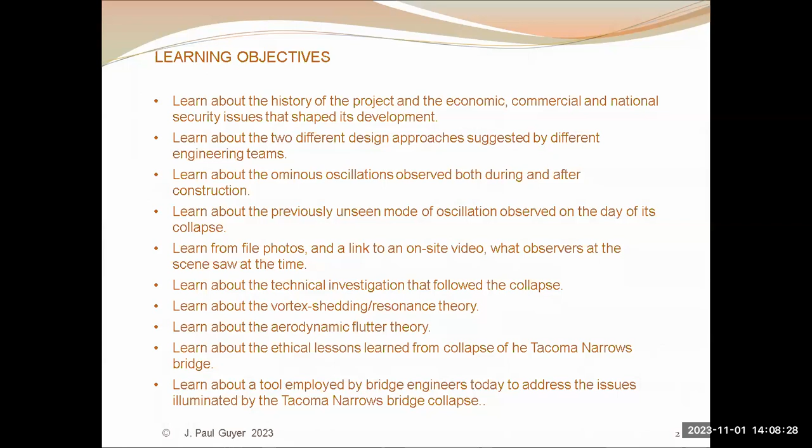Now here's what I'll be talking about, kind of the way we'll walk through this. First of all, I'm going to give you quite a bit about the history of this project, because it's because of the history of the project that the ethical issues arose. This will hopefully be clearer as I move forward. We'll look at the design proposals for this particular bridge, the Tacoma Narrows Bridge.

The problem with the bridge cropped up while it was still under construction, before it was ever completed. And the big indicator that something was wrong is the bridge started to oscillate. There were some Band-Aid type measures applied to the bridge to try and mitigate this oscillation. Then on a particular day, the oscillations increased greatly and the bridge collapsed.

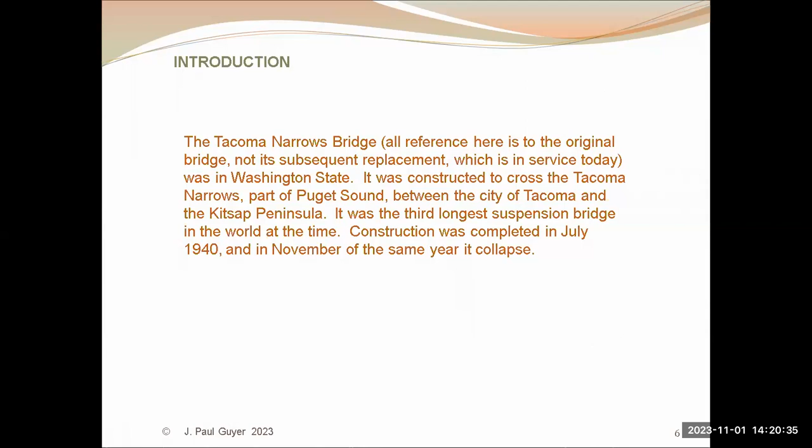This bridge was constructed to cross the Tacoma Narrows part of Puget Sound, between the city of Tacoma and an undeveloped area called the Kitsap Peninsula or Olympic Peninsula. This bridge was at the time the third longest suspension bridge in the world. Construction was completed in July of 1940, and in November of that same year, it collapsed.

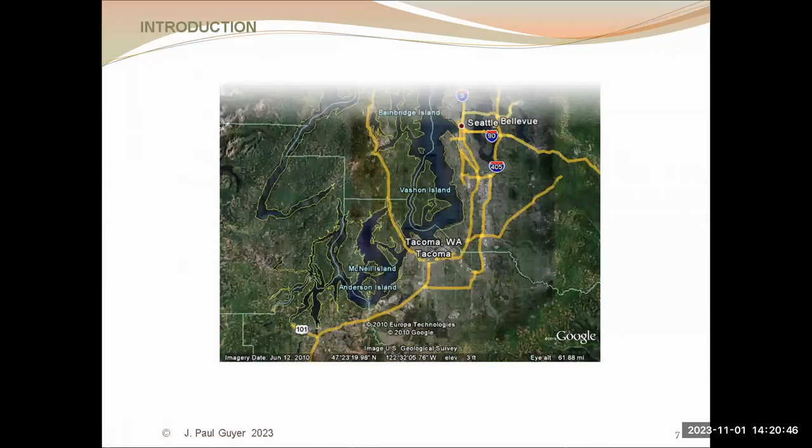Let's see, I've got an indicator here that there's a chat message. Okay, Joseph said he had a problem connecting to Zoom, but he's connected now.

So anyway, this is what we're talking about. Again, this is going to sound like a history lesson, but I believe it's very relevant, as far as this collapse of the bridge, that you understand the history of it, because it was the history that drove the unfortunate decisions that led to the collapse.

Here you see an aerial view of part of Puget Sound. You see the city of Seattle on the upper right-hand side, and then the city of Tacoma, and the red arrow pointing to the waterway, the Tacoma Narrows - the bridge was across that body of water, that channel.

You also see some things highlighted that you're probably wondering what they're doing there: the Bremerton Navy Yard, McChord Airfield, and Fort Lewis. Bremerton Navy Yard was then, and is now, one of the most important military facilities on the Pacific coast. At the time of this incident there was a facility called McChord Airfield. In the late 30s and early 40s there was no Air Force - the airplanes belonged to the Army - so there was something called the Army McChord Airfield down at Tacoma.

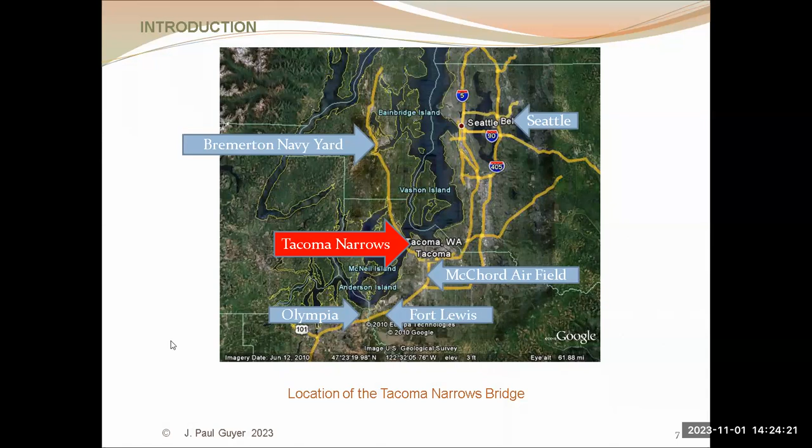The problem was the distance between McChord and Fort Lewis and Bremerton. Here are some numbers that give you a picture of how long it would take to get from Tacoma to different places on the Kitsap and Olympic Peninsula.

Because of all the waterways in Puget Sound, before construction of this bridge, to get from Tacoma, where Fort Lewis and McChord were located, to Gig Harbor on the Olympic Peninsula, driving around all the channels would be 107 miles. But with a bridge across the Tacoma Narrows, the distance would only be 8 miles. So driving time would change from 2 hours 10 minutes to about 17 minutes. Specifically from Bremerton to McChord, driving around without the bridge would be 79 miles versus 39 miles with a bridge, so driving time would be reduced from an hour 50 minutes to 55 minutes.

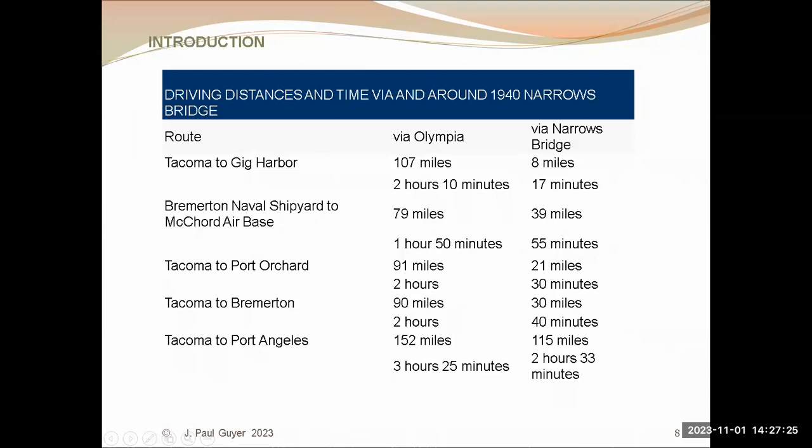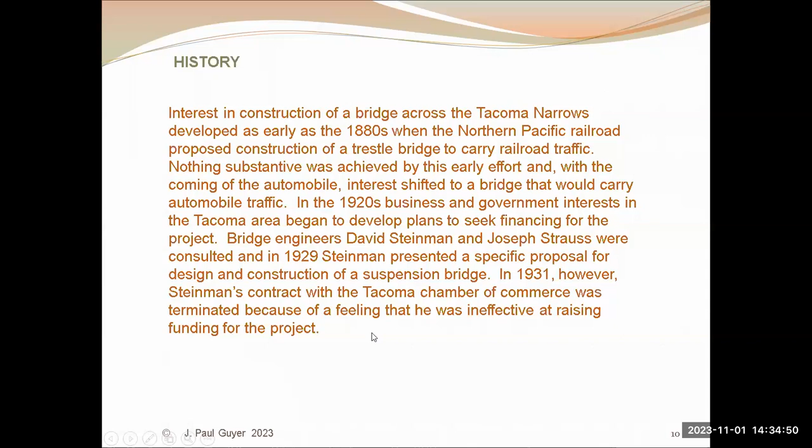And the business and government interests were interested in having a bridge across the Tacoma Narrows for their commercial purposes, to get between Olympia and Seattle and Tacoma and Seattle. So in the 1920s, commercial interests began to agitate for a bridge across the Tacoma Narrows, and the city had some bridge engineers draw up some schemes to use to try and get the financing for a bridge.

Let's see, hang on a second. I've got a leaf blower outside my window. I'm going to put some shutters down. Hang on for just a minute.

Okay, I think I may have gotten rid of that

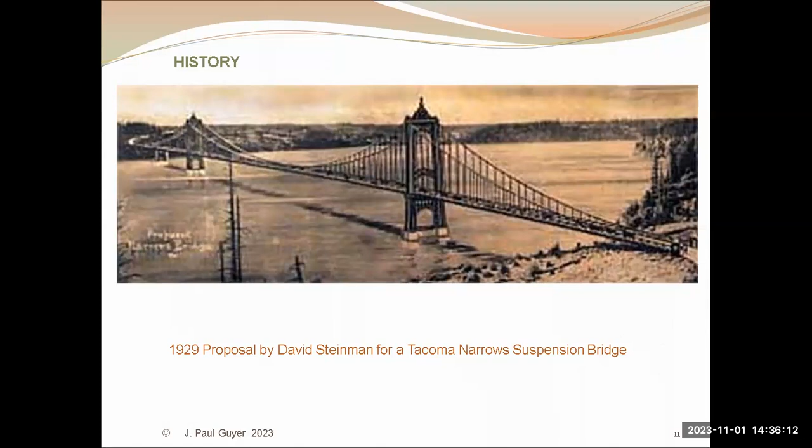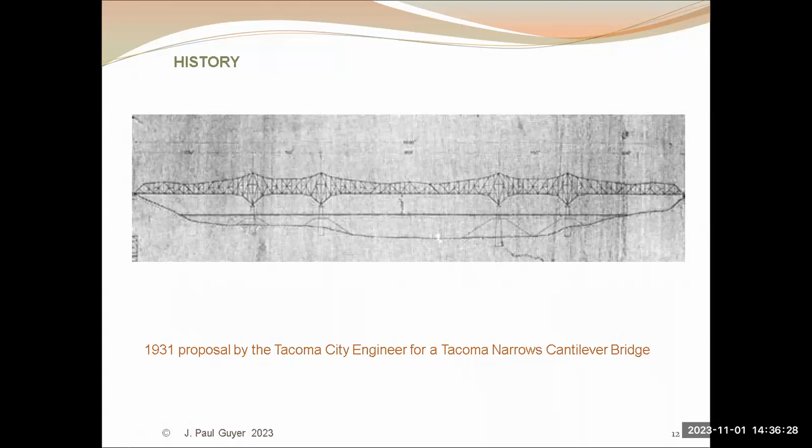So here was a proposal, a nice, attractive bridge, and no money to build it with. Here was another scheme that was proposed, a cantilever bridge, drawn up by the Tacoma City engineer. Design but no money to build it with. So no money to build a highway bridge across the Tacoma Narrows, and it was impractical to design a low-level railroad bridge.

So the commercial and business interests in the region and the state of Washington government began looking around for other ways to possibly finance the construction of the bridge.

One scheme that was explored was to use tolls to construct a toll bridge, and people would pay to use it. Nice idea, but the demand for automobile traffic up there at that time in history was very limited. So the amount of traffic possible just wasn't there to fund the construction of a toll bridge. And so that didn't pan out.

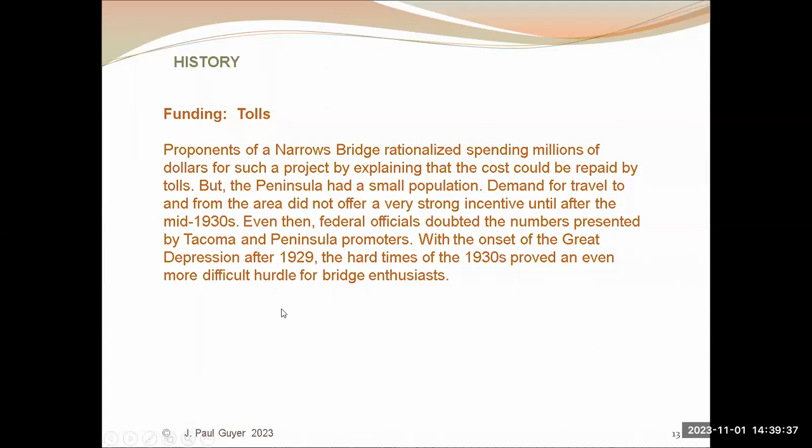But then, as you moved into the 1930s, the specter of World War II began to appear on the horizon. The importance of the Bremerton shipyard was very clear to the politicians in Washington, and the importance of McChord and Fort Lewis to protect Bremerton was also quite clear.

So the federal government began to take an interest in providing funding for the construction of a bridge. Along with the specter of World War II coming on the horizon, this was the 1930s, and of course, as we know from our history books, the US was in a deep depression during this period.

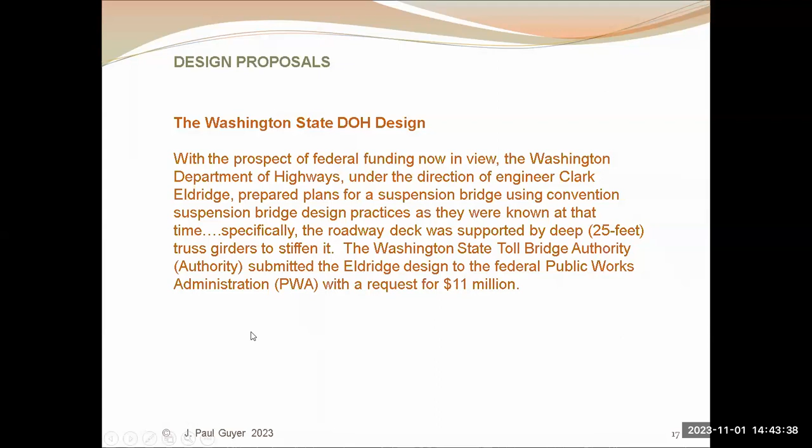The Washington State public agency that was cobbled together was something called the State Toll Bridge Authority, and the engineer who took the lead in proposing a design to the federal government was a gentleman named Clark Eldridge. He was the project engineer on the Tacoma Narrows Bridge proposal as put forth by the state of Washington.

An aside that has nothing to do with this story, but it's an interesting little vignette. The director of the Washington State Highway Department at that time was Lacey Murrow, brother of the very famous newscaster Edward R. Murrow, all through the 40s, 50s, and into the 60s. This has nothing to do with anything, but it's an interesting sidelight.

This was the proposal that the state of Washington under Clark Eldridge proposed: a suspension bridge with roadway support girders that were reflective of the experiential knowledge at that time about how to design suspension bridges, and in particular the roadway support girders.

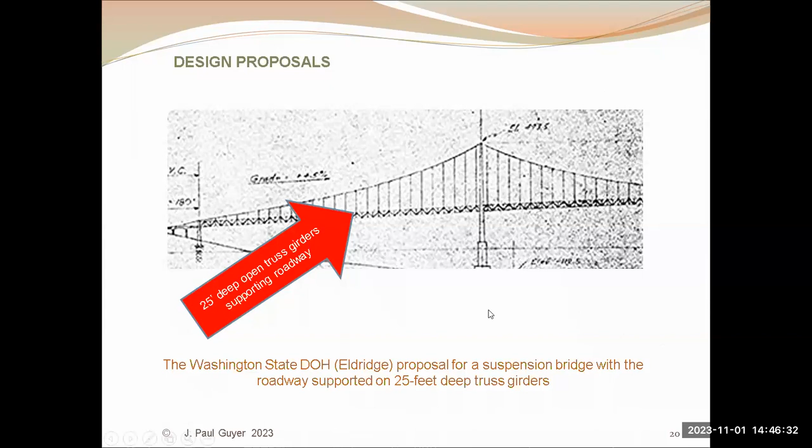So this was the proposal by the state of Washington. Now this is when economics and commercialism creeps into the picture. There's always been a pushing and shoving on major public works projects, whether they should be designed in-house by government engineers or contracted out by private engineers. So the private engineering community, particularly a group of private consulting engineers on the East Coast,

led by a prominent bridge engineer, Moisseiff, who was very well known and had a great deal of credibility at that time. These private engineers undertook to convince the government bureaucrats in Washington who controlled the purse strings to contract out the design of the bridge to them, and to convince federal bureaucrats to mandate that the state of Washington contract out the design of the bridge.

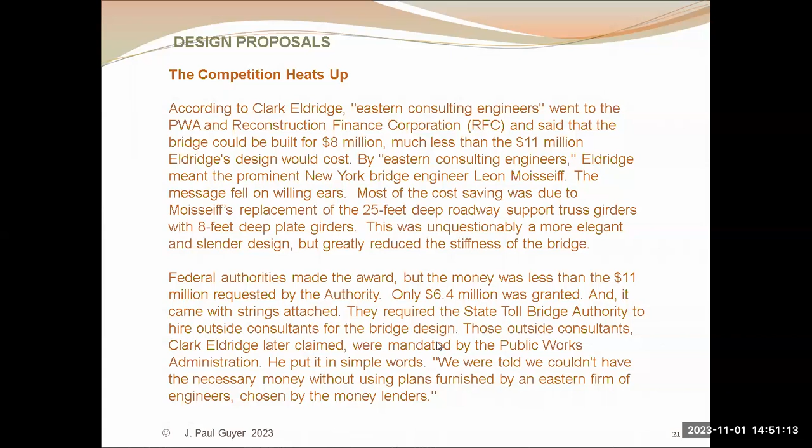The state engineers with the state of Washington were, you might say, upset by this competition from these private engineers. The state of Washington, in addition to its in-house engineers, hired expert bridge designers to evaluate Moisseiff's plan, and it was determined to be, quote, fundamentally unsound. It was indicated that the design made the Narrows Bridge lighter and narrower than any built, and this was done in the interests, quote, of economy and cheapness.

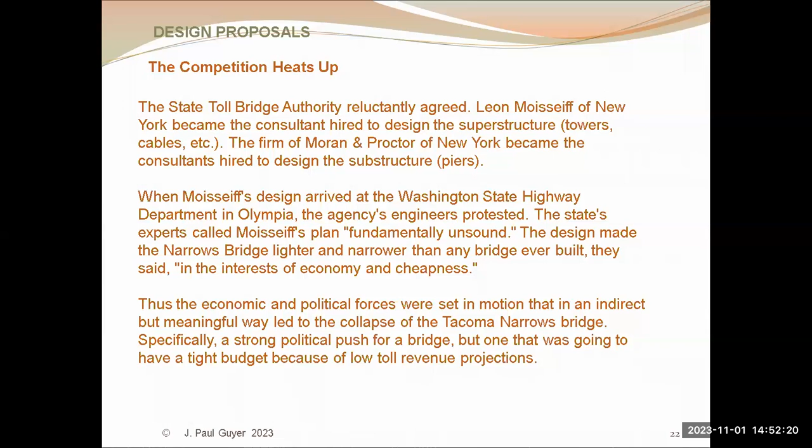So here is Mr. Moisseiff, who was leading the private engineering group, and this was the proposal that he and his associates submitted. It was a suspension bridge, but the big distinction was that the roadway support girders would only be 8 feet deep instead of 25 feet deep, and they would be of a solid I-beam configuration.

An important point that this incident really illuminated was that with open truss girders, the wind passes right through the girders. With an I-beam configuration, wind does not pass through the girders—they just function as kind of a sail, if you will.

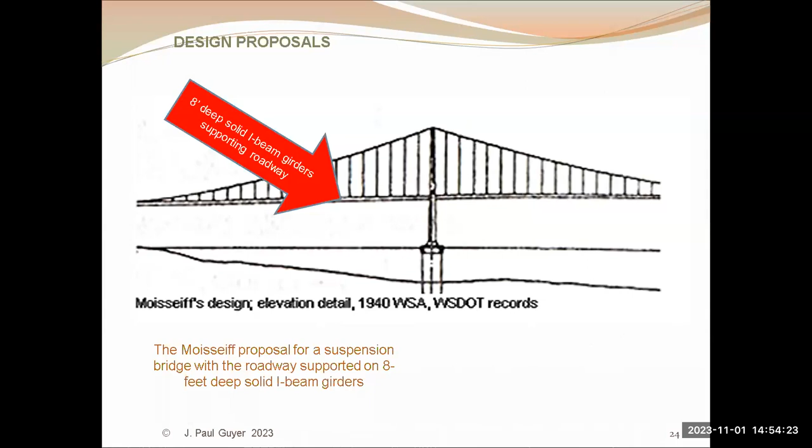So this was Moisseiff's design. He said, I can do it for 6.4 million. State of Washington's design with those big deep truss girders was going to cost 11 million. Give the mandate that the design job be given to us private engineers, and we can save you a lot of money. And the federal government bought that.

Moisseiff relied in his design on a theory of bridge design that had been published in a reputable engineering journal put out by ASCE, and it represented a deflection theory developed by an Austrian engineer.

And essentially, what his theory said was that the wind loads - and remember, Tacoma Narrows is a very windy place - did not have to all be resisted by the roadway girders, but would be transferred to the cables. So the roadway support girders did not have to be as structurally robust. But there had never been a bridge built like this, so there was no experiential knowledge. It was just theoretical knowledge, if you will.

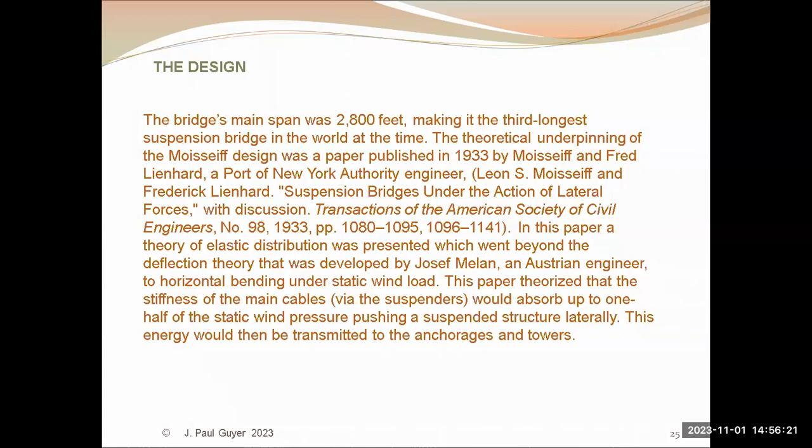And this is what Mr. Moisseiff, to a large degree, relied on, and it turned out to be tragic.

Another factor here with Moisseiff's design was that the traffic load at that point in history was projected to be very light, not much traffic. So only two lanes of traffic were designed into Moisseiff's design. So not only is it very shallow, but the roadway was narrow, and that narrowness reduces the rigidity of the combined girders and roadway structure.

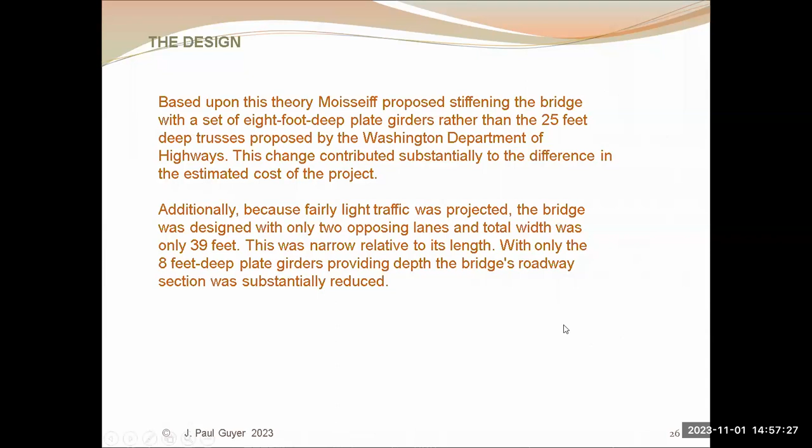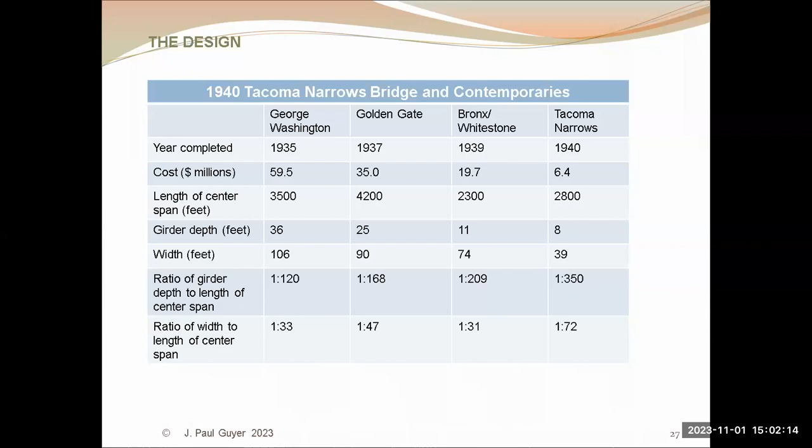So for Tacoma Narrows, the federal government said, we'll put up the money, but you've got to farm out the design to private firms. And so Moisseiff and his associates undertook the design of the bridge. Construction began in September of '38. The bridge was completed and opened to traffic in July of 1940.

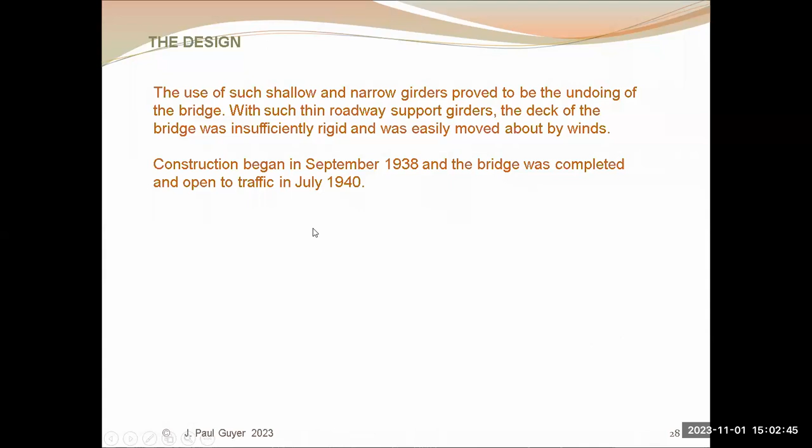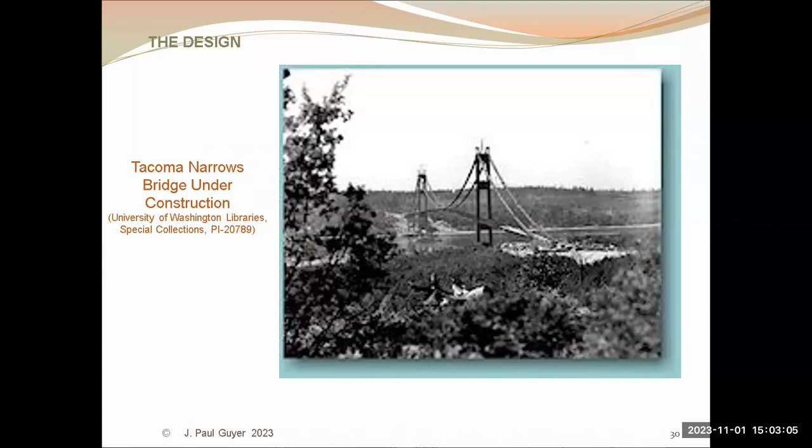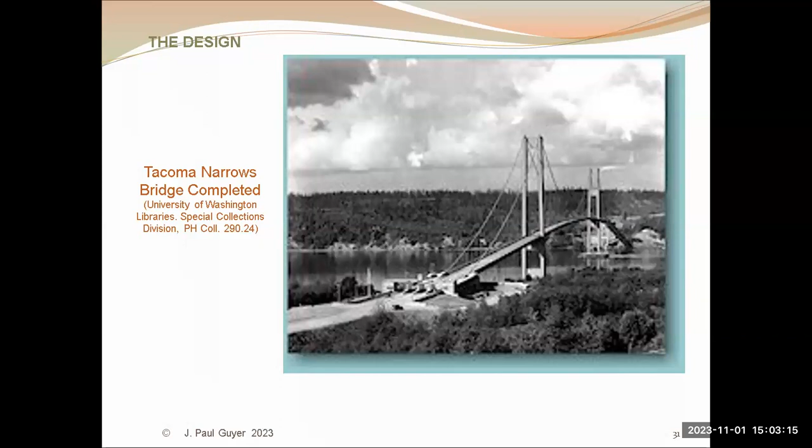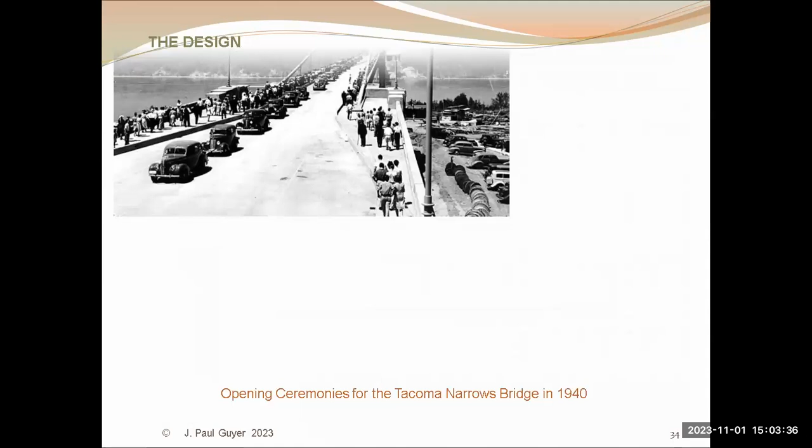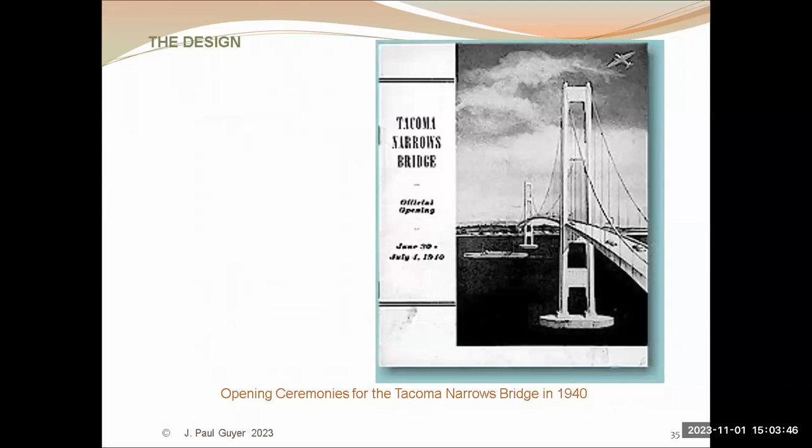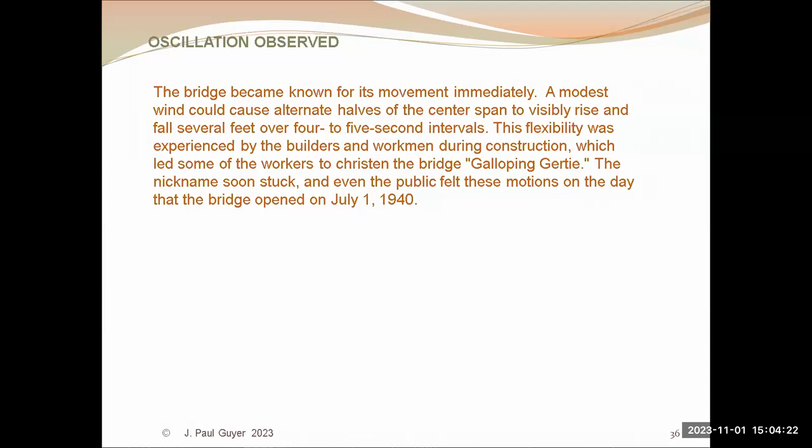And the program for the opening day's festivities. But the bridge became known for its movement immediately. Even while it was still under construction, even modest winds would cause the center span to visibly rise and fall over 4 to 5 second intervals. The flexibility was continuously experienced by the builders and workmen, who gave the bridge the nickname Galloping Gertie.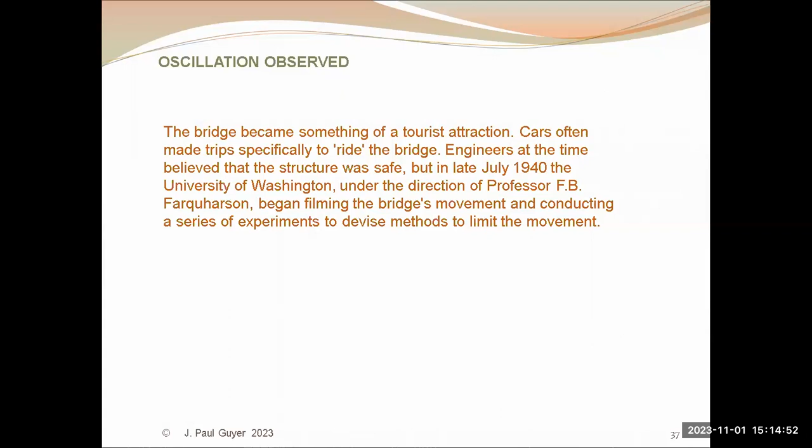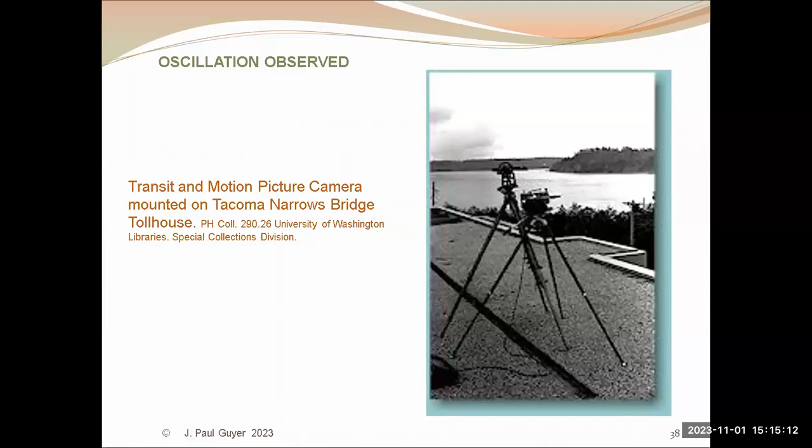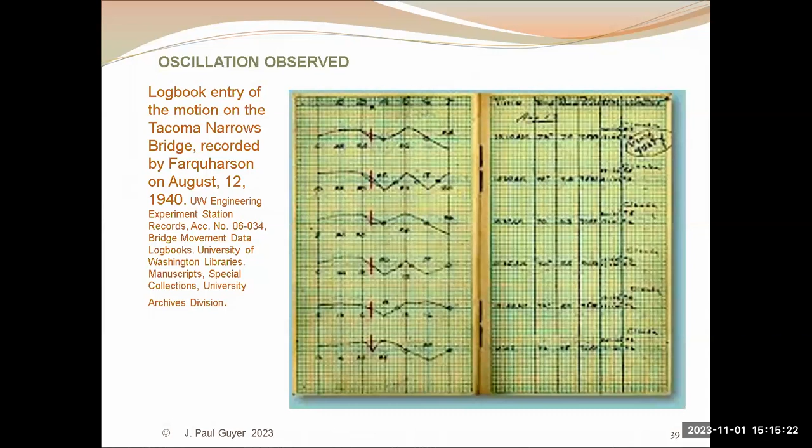Here is some of the high-tech equipment that Farquharson had available to him: a transit and probably an 8mm movie camera. And these are some of Farquharson's notes during the studies he undertook.

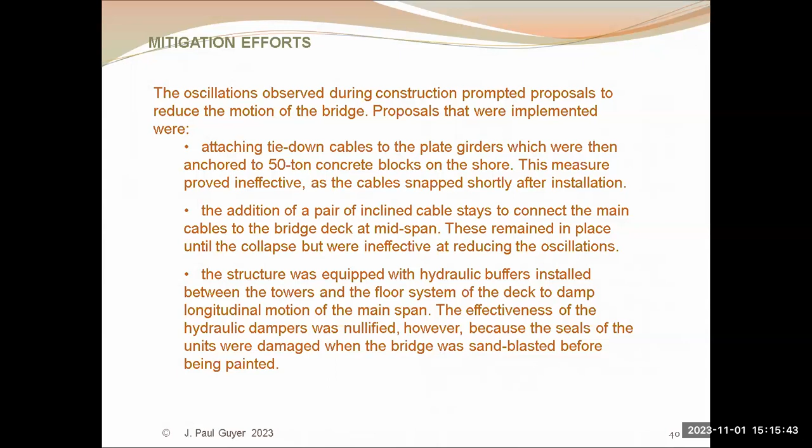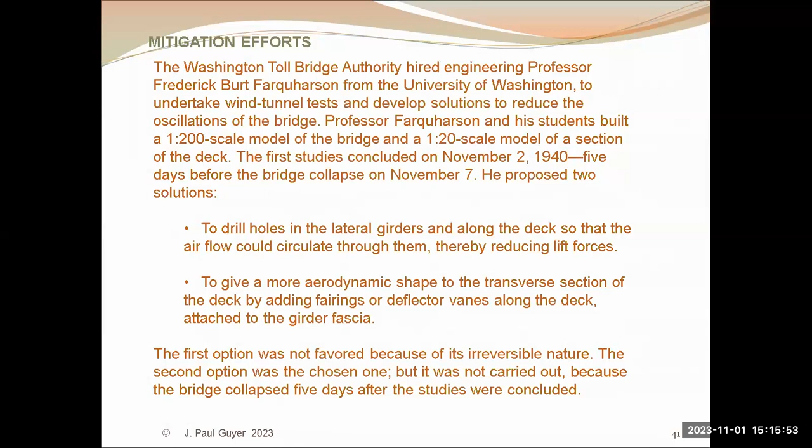Different Band-Aid schemes were tried to control the oscillations: tie-downs, hydraulic buffers, and so on. One of the goofier ones, but apparently a legitimate consideration shown in a newspaper cartoon, was to drill big holes in the I-beam web so the winds could pass through. But of course, if you did this, you're substantially weakening the girders, so this was obviously a non-starter.

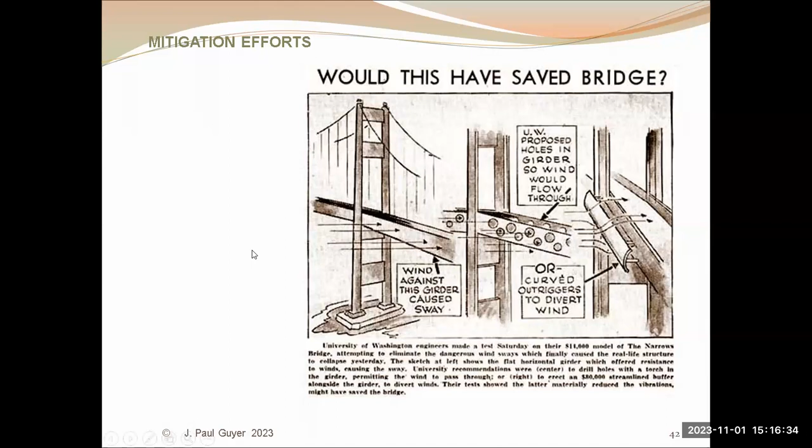The Whitestone Bridge, as I characterize it, was the evil twin of the Tacoma Narrows Bridge. But the operators and designers of the Bronx Whitestone were able to learn from what had happened at Tacoma Narrows, and immediately made improvements, primarily increasing the depth of the roadway support girders in 1946.

The reason that remedial work was not undertaken until 1946 was because there were great constraints on the ability to acquire steel during World War II, since it was needed for military purposes. Another improvement was streamlining fairings, which were added in 2004. So although the Bronx Whitestone was the evil twin, it's held up nicely apparently.

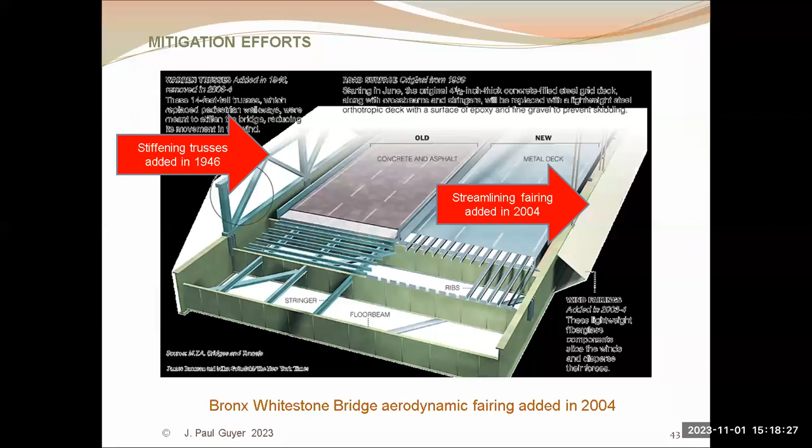In November of 1940, the bridge had just been completed. Wind was blowing through the Narrows at a steady speed of about 42 miles an hour. Those words, steady speed, are important, and that'll become clear as we move along.

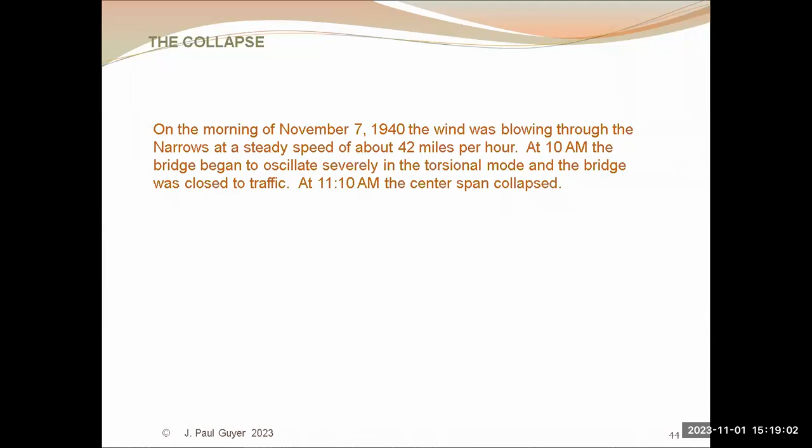At 10 in the morning, the bridge began to oscillate severely in the torsional mode rather than the transverse up-and-down type mode that had been observed previously. Here are some photos of the bridge beginning to oscillate in the torsional mode.

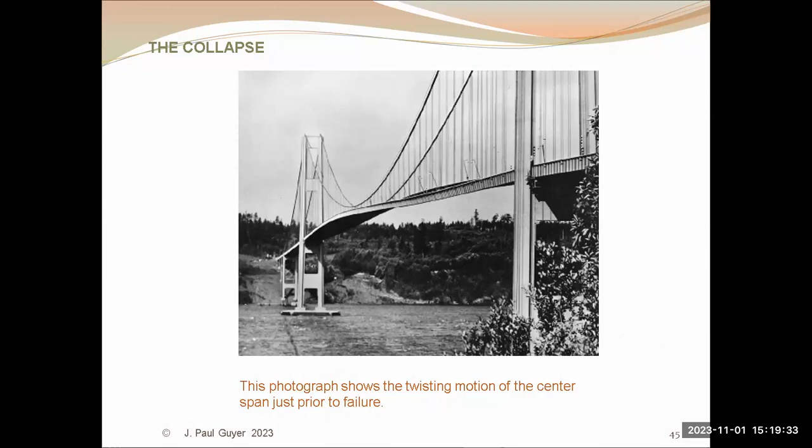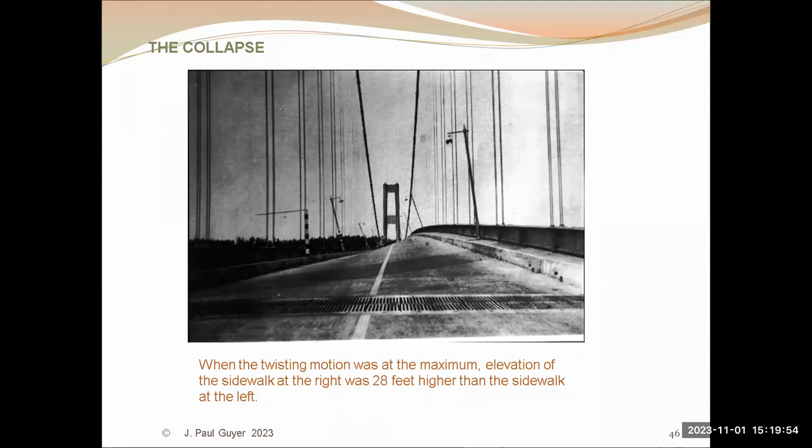One of the theories was that perhaps one or more of the suspender cables had broken, creating an imbalance between the two sides of the roadway and their girders. At its maximum, the twisting motion was such that the sidewalk on one side was 28 feet higher than the sidewalk on the other side.

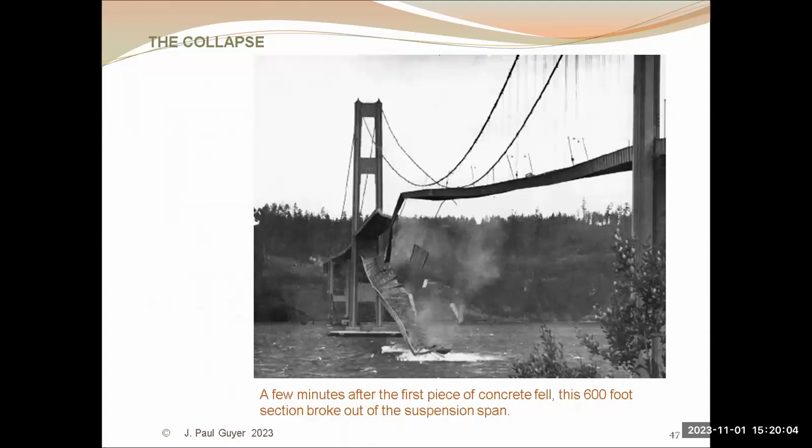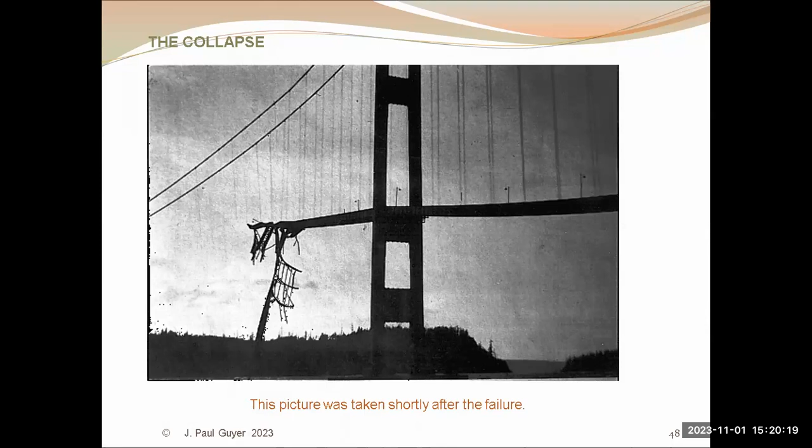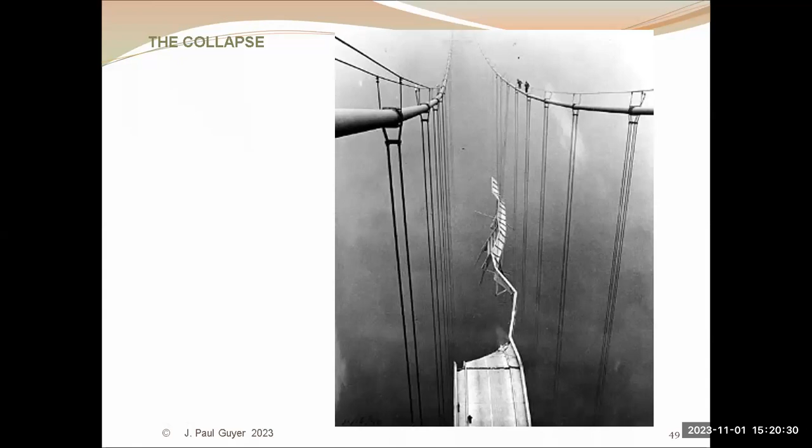And here is the bridge in its collapse, and the end result: damaged cables, and the thrashing about damaged the towers and piers.

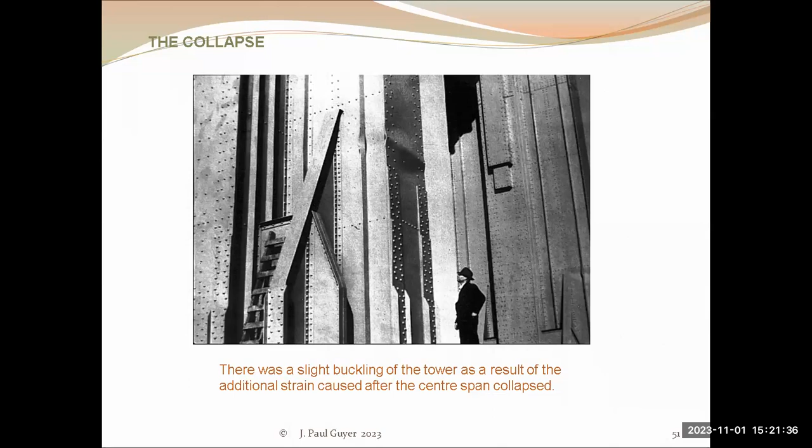One of the fortunate things about this incident was that the oscillation was observed early in the morning and had been observed previously over months. When on this day the oscillations became particularly violent, there was time to close the bridge, so there was no traffic on it, and there were no fatalities or injuries as a result of this collapse. That was fortunate.

As indicated, there were no fatalities, except for a little puppy dog that had to be on the bridge. Also there was a car that got stalled on the bridge, and the car went in the water, but the people got off. So now the investigation begins.

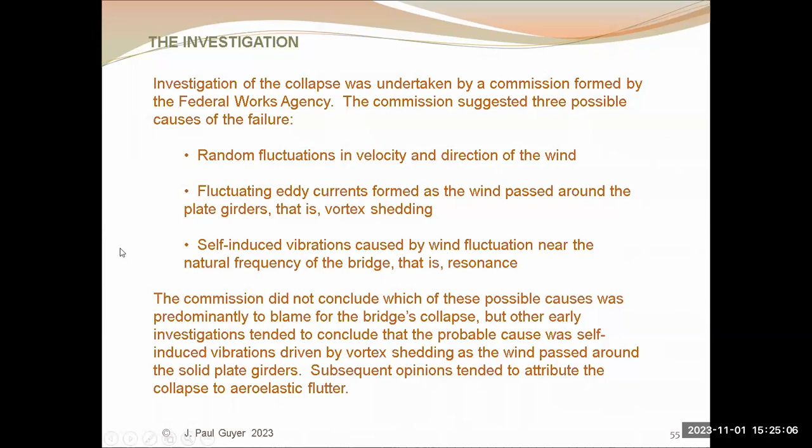Why did this happen? One early theory was that it was caused by resonance, but that pretty quickly got shot down, because for resonance to be the cause of a failure like this, you have to have a forcing mechanism, something forcing the structure to oscillate, like the wind. So if there were an oscillating wind, and if it were oscillating right at the resonant frequency of the bridge structure, which is a highly difficult thing to calculate, then resonance might have been a factor. But it was clearly documented that the wind was not oscillating when this happened—it was a steady 42-mile-an-hour wind, so there was no oscillation. So resonance failure is not a reasonable thing to conclude.

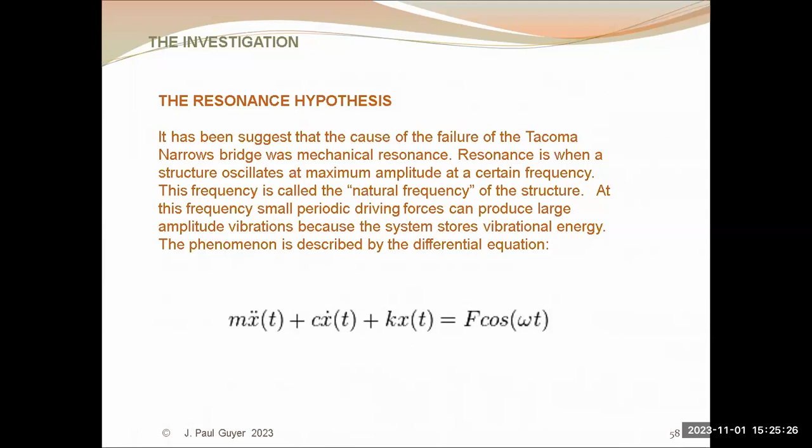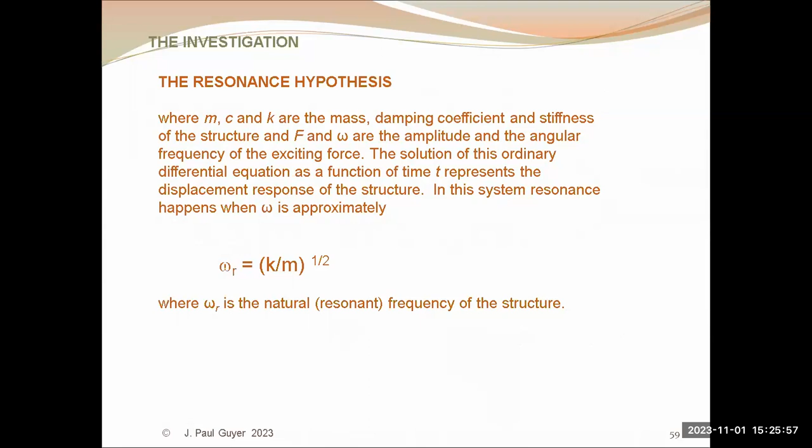This is a discussion of the resonance theory. The federal task force established to investigate this included Theodore von Karman from Caltech, who has been through history one of the leading lights in aerodynamics, primarily of airplanes. He was asked to serve as chair of this task force, and the resonance theory got pretty well discarded.

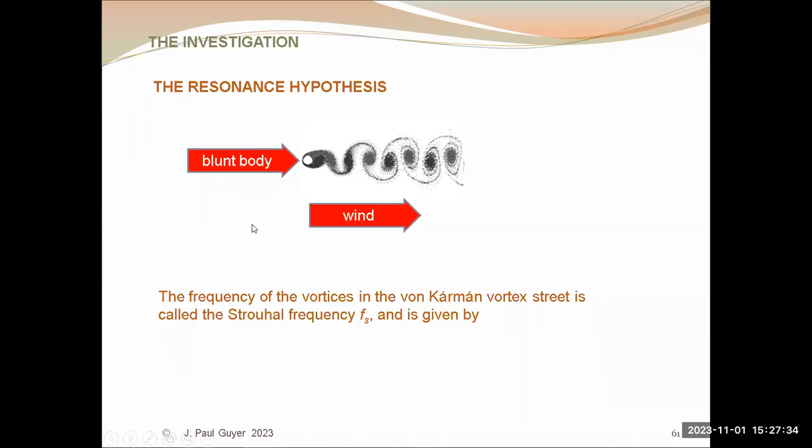But what quite possibly might have been acting on the bridge was what has come to be called von Karman vortexes. If you put a blunt body in a wind stream, the wind as it passes over the blunt body spins off behind in kind of an oscillating mode, like you see in this illustration. This occurs with wings on aircraft—one of the reasons on the latest generation of commercial airliners for those turned-up wingtips is to mitigate the von Karman effect. So this probably had something to do with why, on this windy day, it was set into its oscillating mode. There's more discussion here on these slides of this von Karman effect.

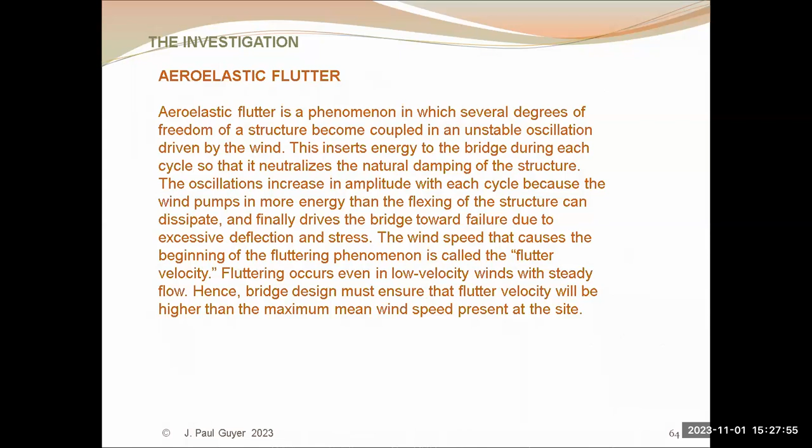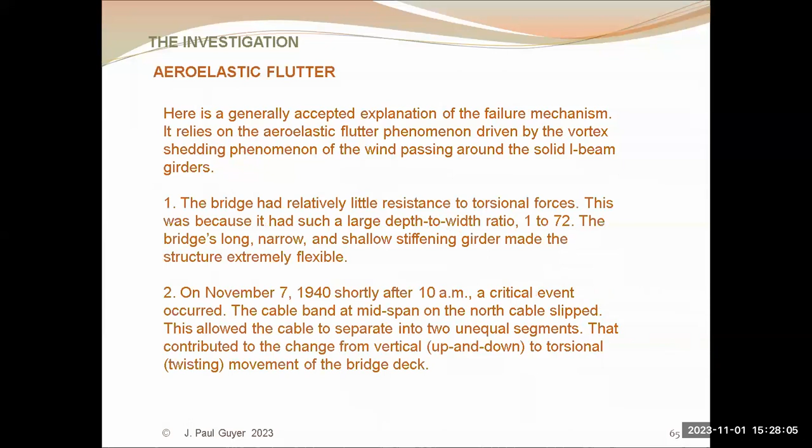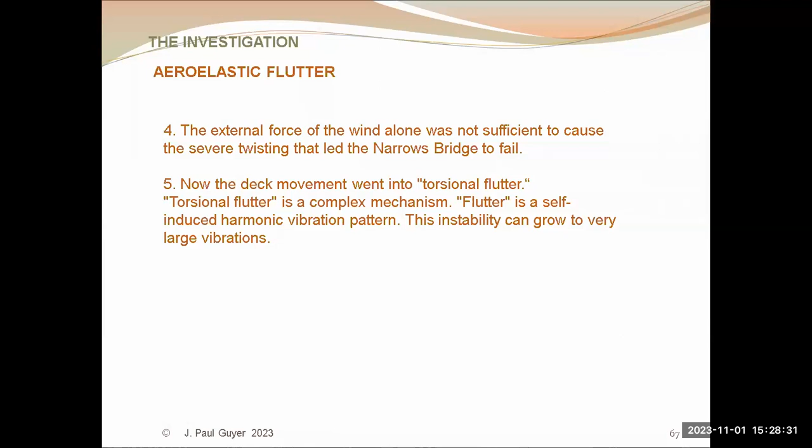There's another phenomenon called aeroelastic flutter. Essentially, to visualize it: if you take a piece of paper—say a 1-inch strip or a 2-inch strip—hold it horizontally in front of you, and then let it go, as it falls to the ground it flutters around. That's aeroelastic flutter, which is a random fluttering.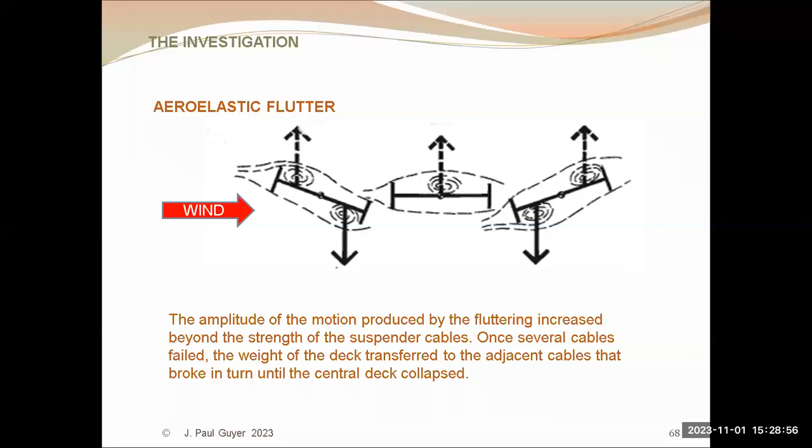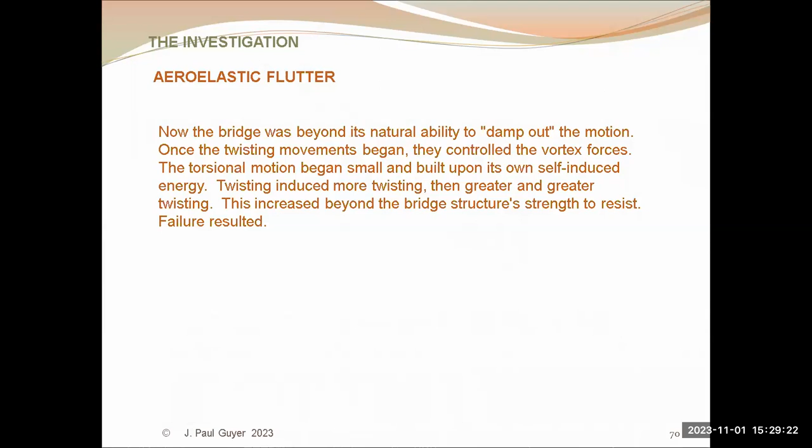One of the things that was discussed was that perhaps the roadway deck was subjected to aeroelastic fluttering. Could be, maybe not. So the cause of what induced the oscillations was possibly the von Karman effect and then aeroelastic flutter.

There was a very well-known structural engineer, bridge engineer, Othmar Ammann, who was a member of the investigating commission. He said that the Tacoma Narrows Bridge failure has given us invaluable information. It has shown that every new structure that projects into new fields of magnitude involves new problems, for the solution of which neither theory nor practical experience is an adequate guide. It is then we must rely largely on judgment, and if as a result errors or failures occur, we must accept them as a price for human progress.

I don't really go along with that. I think you've got to recognize that if you do not have a body of experiential knowledge of what works for the design of a bridge like this in a location like this, you have to proceed very, very carefully if you undertake to step outside the envelope of that experiential knowledge.

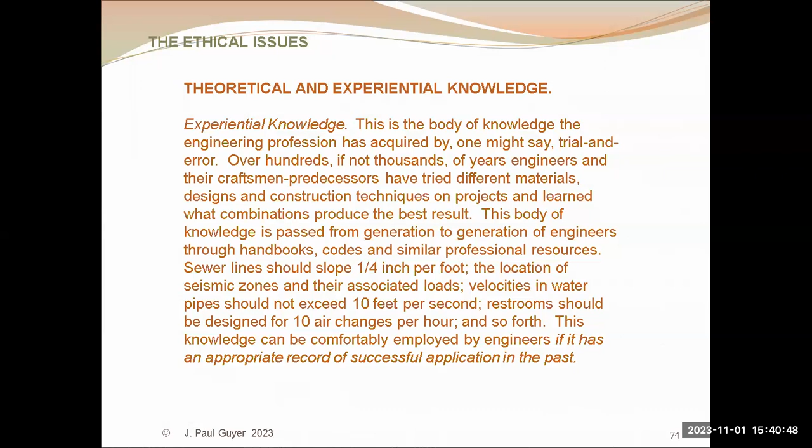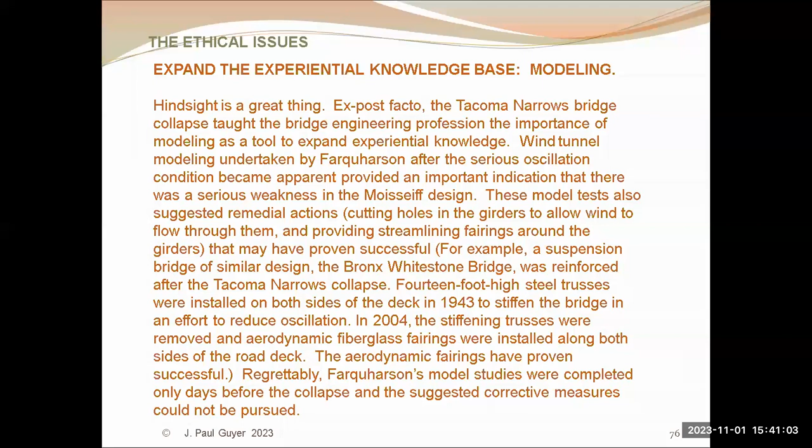Okay, now let's see, I'm looking at my clock here. So let's get through, pardon me, the earlier question about the retrofits at the Bronx Whitestone Bridge.

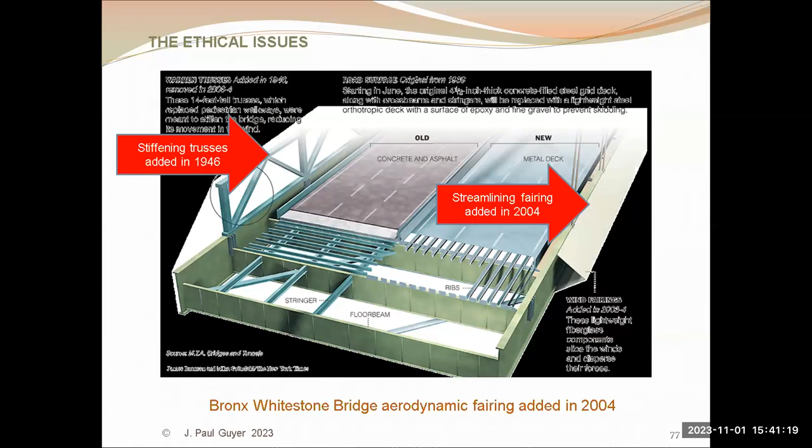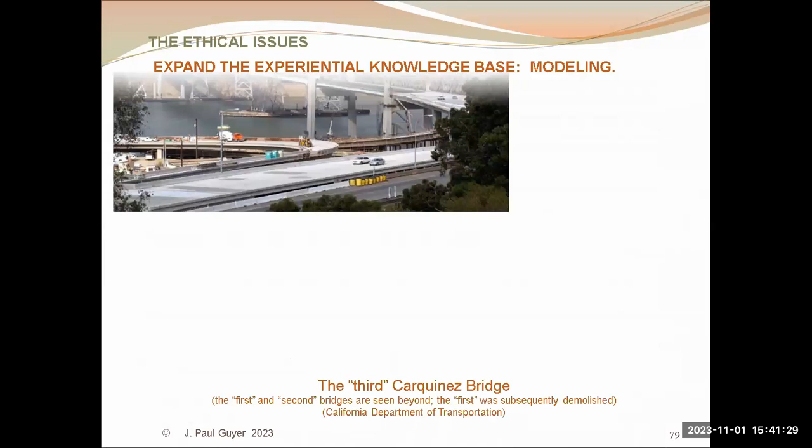This shows clearly what was done, and the bridge is working fine. And modeling, I've talked about that already. Wind tunnel testing - this bridge, which is near me, where they did substantial wind tunnel testing.

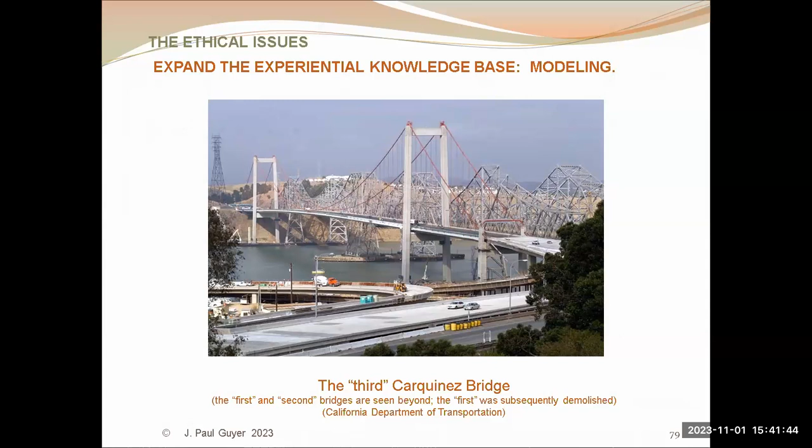Let's pause here, let me get to the lessons learned. If the theoretical knowledge base underlying a design is weak or incomplete, it must be supplemented by an adequate base of experiential knowledge. And if the experiential knowledge is weak or incomplete, it must be expanded until it is adequate. A principal way of practically doing this is through appropriate modeling, perhaps computer modeling.

In the example of the Tacoma Narrows Bridge, the modeling that might have prevented the collapse was wind tunnel model testing. And in competing for engineering contracts, do not propose designs that are not supported by an adequate and complete theoretical and/or experiential knowledge base. Do not compete for engineering contracts by making claims that you can complete the project at a lower cost than your competitors, because you do not have control of all those dozens and dozens or hundreds and hundreds of people running around on a job site.

Okay, let's see if we've got some questions here. Eugene asks, did the Eastern engineers stay in business? I wasn't able to go to the morgue. But my understanding is that Moisseiff's career - he had been a very well-known and highly respected bridge engineer - until this Tacoma Narrows Bridge incident occurred. My understanding is that his career was destroyed from that point forward.

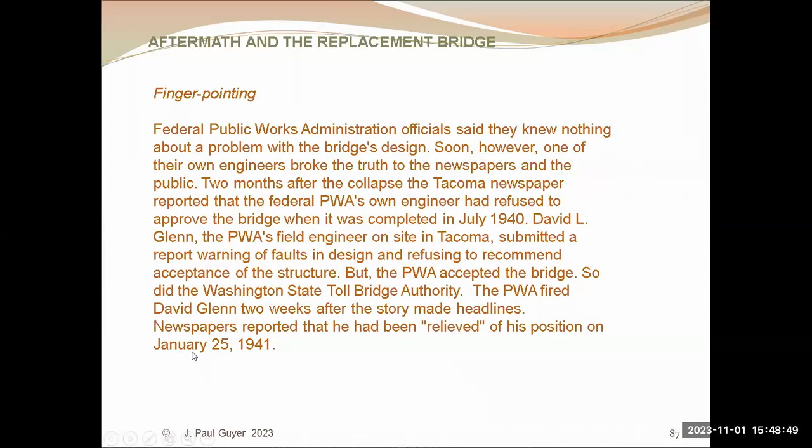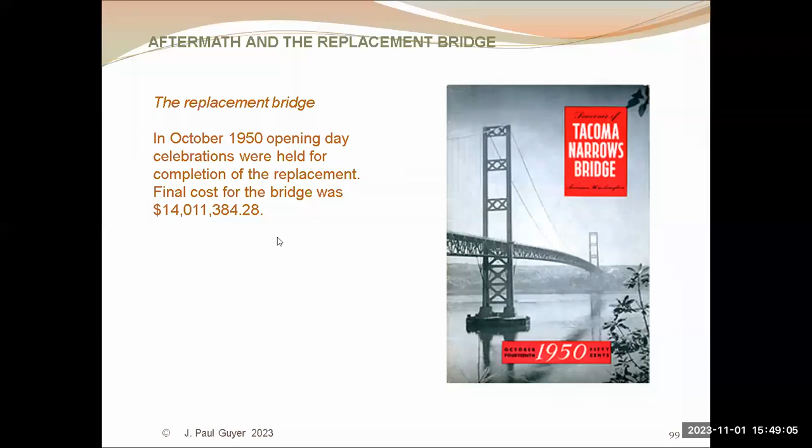So all right, let's see, let me get to the quiz here and just run through it real quickly. Here, this was the replacement bridge, and you notice also that it's 4 lanes instead of 2, and you see that the support girders are open web girders.

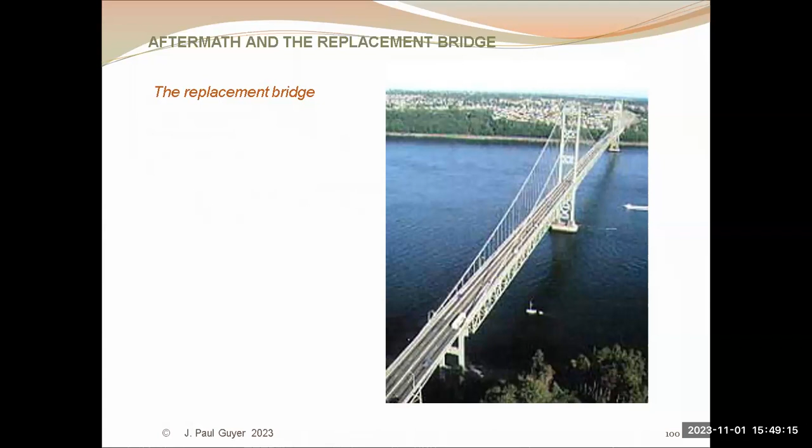All right, now let's run very, very quickly through the quiz here. It's not rocket science by any stretch of the imagination. Question 1, the Tacoma Narrows Bridge was of the blank type. That, of course, is D, as in dog, suspension.

Question 2: the Washington Department of Highways proposed blank girders to support the roadway. The answer is C, steel truss girders. Moisseiff proposed blank girders to support the roadway, and what he proposed was solid steel I-beams, D as in dog.

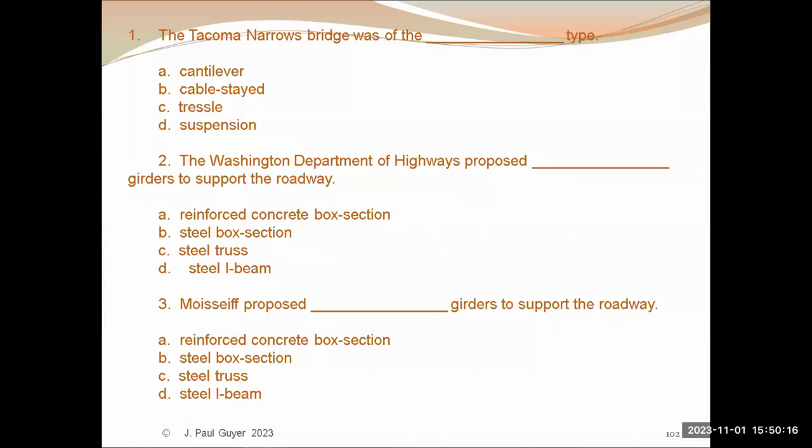Number 4: the United States blank strongly supported construction of the bridge. Best answer is A, the military, because of the specter of World War II. The blank provided the majority of funding for the project, and that federal agency that controlled the purse strings was C, the Public Works Administration.

Number 6: prior to the day of collapse, the oscillation of the bridge that had been observed was the blank type, and that is transverse, just up and down in a sinusoidal curve. Number 7: on the day of its collapse, the oscillation observed was of the blank type, torsional, twist twist twist.

A pretty good guess of what had happened was that one or more of the suspension cables broke on one side, and there was an imbalance in the resisting force of the bridge.

Number 8: blank was not one of the possible causes of the collapse identified by the Federal Works Agency in the initial investigation. One theory thrown around was that the wave action of the water had somehow caused this oscillation of the bridge, and that was discarded pretty quickly. Some videos available on YouTube show shots of the water surface at the time of the collapse, with moderate little fluttery waves, but nothing significant.

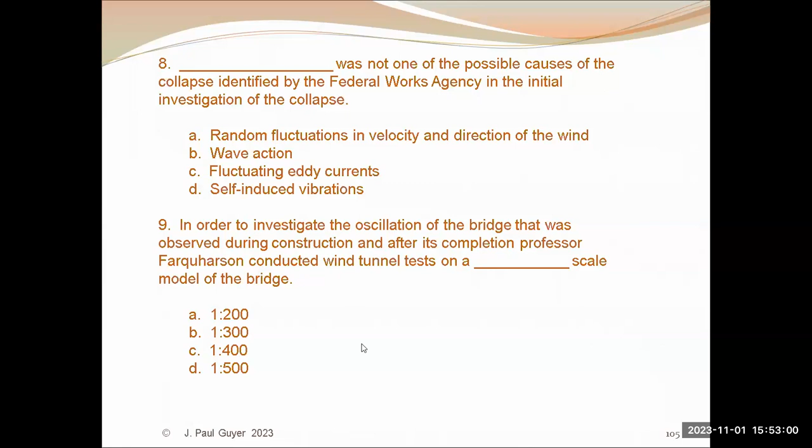Number 9: in order to investigate the oscillation of the bridge observed during construction and after its completion, Professor Farquharson conducted wind tunnel tests on a blank scale model of the bridge. He did this after the bridge had collapsed, and it was a 1 to 200 model that he fabricated.

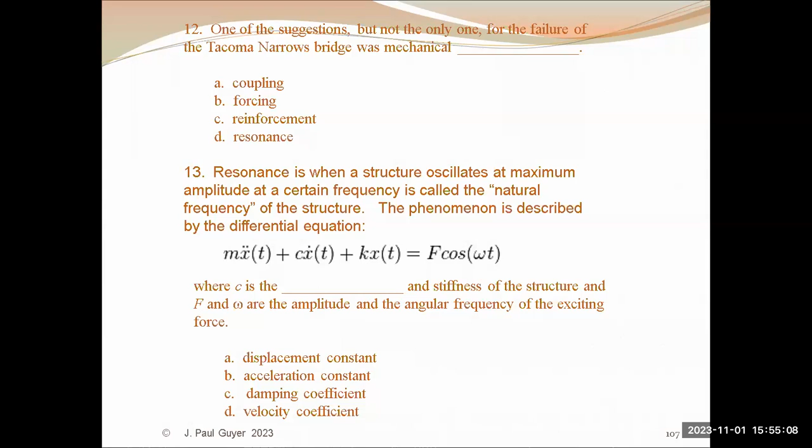So that takes us to... any more questions? Let's see, there was one after six. No, that's from Hisham.